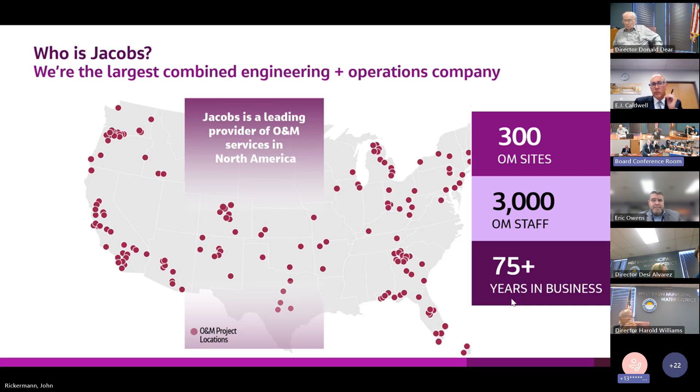Jacobs, as Director Alvarez mentioned, is a large engineering firm with a very significant operations branch, and that's fairly unique. In fact, we're the largest combined engineering and operations firm in the country, and maybe the world. Here are the sites we currently service, over 300 operation sites, and we have over 3,000 staff. If you look at California, you can see all the work we have here: 200 staff, 40 projects, and 500 engineers. We'll be deploying all this experience towards you. Now I'd like to turn it over to Sunshine Smith.

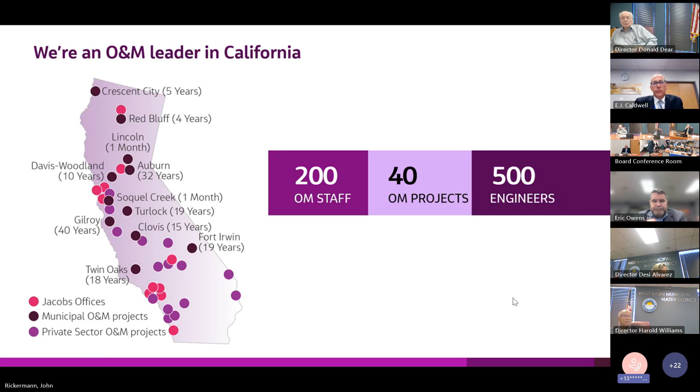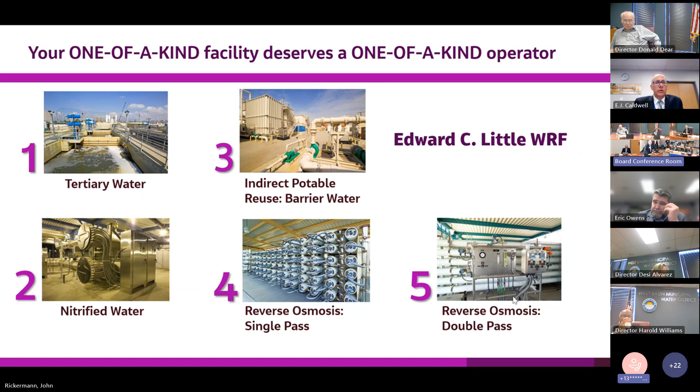Yes, of course, you know this. You literally have a one-of-a-kind facility in the world. There's no other facility, literally, that creates 5 different qualities of water from one source water. And the truth of the matter is, because of this, you deserve one-of-a-kind service of operations.

Thanks, Rich. So as Jacobs and Rich just talked about, we are a very large engineering firm. We provide operations, as he talked about, and maintenance, which includes asset management, preventative maintenance, and corrective maintenance. Steve's going to touch on that a bit more. Our digital tools, we're one of the leaders in that, John's going to talk about. We provide training and educational opportunities for all of our staff to make sure they're always finding that next step and learning more. Community outreach is a really important aspect to us.

We like to do tours of our facilities. Like this weekend, we have a golf tournament happening at our Gilroy facility. So we always like to involve the community, teach them where their water is being treated or where their drinking water is coming from. And then, as Rich touched on, engineering support, that's one of my specialties. I've been on the engineering consulting side for 17 years, and I've been able to meet all of our staff, build relationships with our design teams and consultants. Then we go into our facilities and assess and evaluate how that site specifically needs those engineering services.

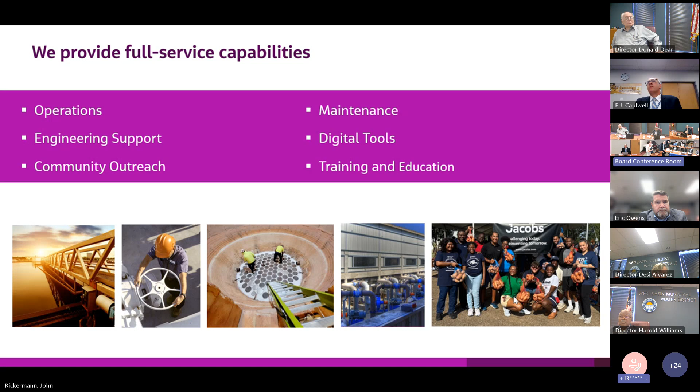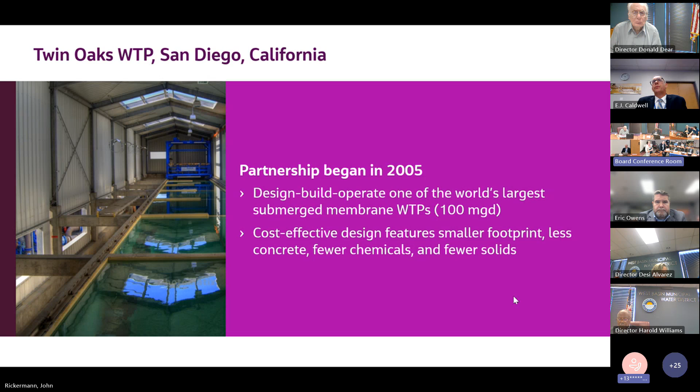So a couple of examples where we bring in all of these capabilities. Our Twin Oaks facility down in San Marcos - I just came from down there. We started our partnership with them almost 20 years ago, and we've been operating since 2008. They have one of the world's largest submerged membrane facilities. I think when they were built it was the world's largest - by now a couple of others have popped up.

As those of you who attended the Water Reuse California conference this week know, this was a big topic: the Soquel Creek facility that's going in, Pure Water Soquel. We've been in partnership with them since 2020 as the one-of-a-kind OMAR contract that John talked about.

So Soquel Creek's been a really fun project. Like Sunshine, I also started as a consulting engineer for about 10 years before I saw the light, or went to the dark side - take your pick - and went over to the operations side. I've been in the O&M side of the business for 22 years now. So Soquel Creek's been really interesting, as I'm sure you guys heard a lot about.

There's something we've discovered, because we also have a design build business in Jacobs: control systems are very important when you're starting up an advanced system. So we've actually gone ahead and are building, it's almost done, a digital twin for this facility, which basically mimics the control system and the hydraulics. To Sunshine's point, this helps with operator training when we take over, but it also helps us find gaps we want to know about before we start up. So that's just an example of some of the digital tools we're bringing to this really fun project.

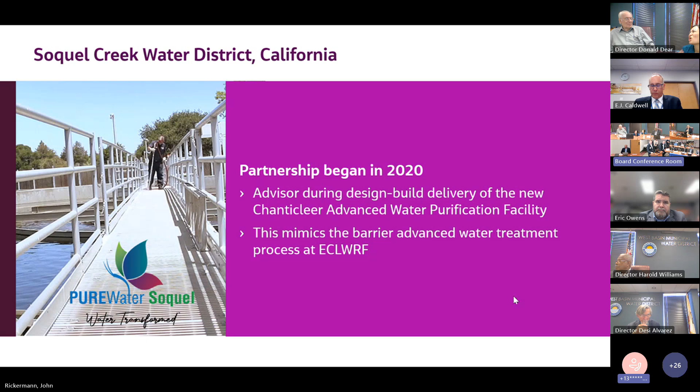We have a lot of other digital tools that we're working on. And the point I want to make about what we're doing with our digital tools: it's not business as usual. We've all been doing IT, we've all got laptops in front of us, right?

We've been doing this for decades. We've all got OT, the industrial control side, SCADA, PLC. We've been doing that for decades. Cybersecurity, fortunately, is picking up steam and we're doing more of that. But that's the traditional digital stuff we all have to do. That's the foundation for any plant these days.

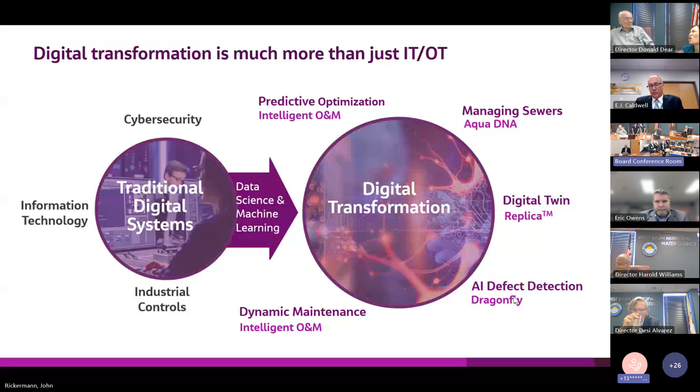I like to talk about this with an analogy. This is the way we're doing this: it's like driving directions on your smartphone. You type in on your GPS where you want to go, and your smartphone is accessing Waze or Google Maps or whatever. What's that accessing? It's got all the geography, the mapping, the traffic reports, the police reports, the weather reports, the traffic patterns. It's got all of that information available, and it's pushing to you a recommendation of your best route to get where you're going in the least time and save money.

We are doing the same thing with our O&M staff. We have all this information we've been collecting for decades, and we're leveraging that to provide a recommendation to our O&M staff. They're still the licensed operators, just like you're still the licensed driver when using your smartphone. If it tells you to get off at an exit and you want to take the scenic route, that's your option. Same with our O&M staff—we make a recommendation based on all the data we've got, but predictably, they're still the licensed operator. They make the call. I'm a licensed operator myself, and I want that capability. I trust my O&M staff—they know an awful lot, and I want them to have the final call. So that's how we're doing this.

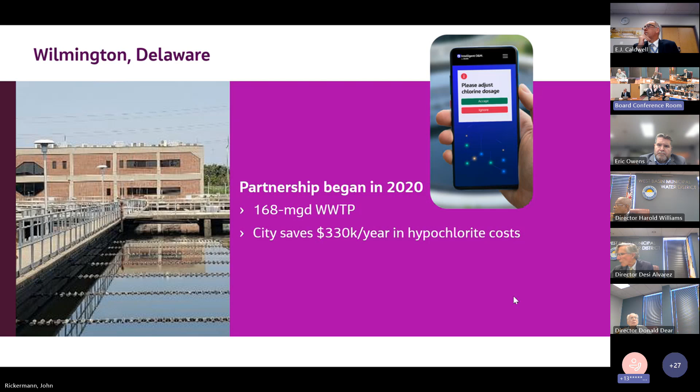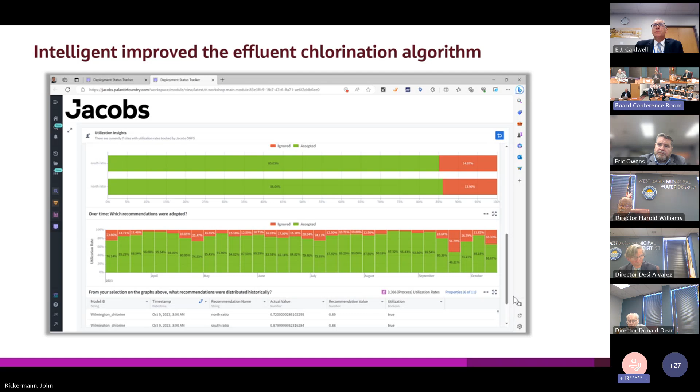That allows us to push recommendations to our staff on the right dosage to make while maintaining perfect compliance. That's created huge savings—over $300,000 a year—and this tracks the adoption by our staff, how often they adopt what's been pushed to them as a recommendation. It's fantastic. It's solving a problem they had, so this is really helping our staff be more effective and more efficient.

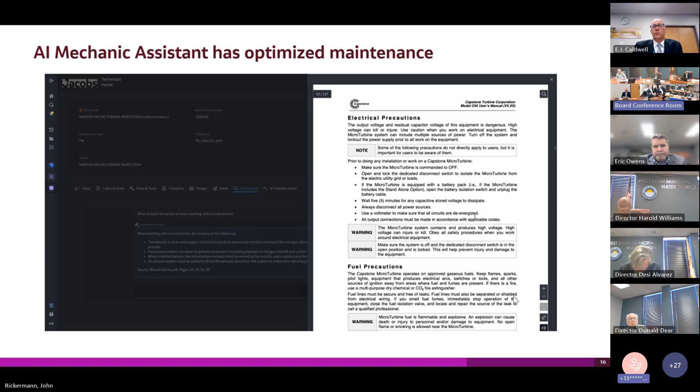Who's got time to read 50,000 comments from the mechanics over the past 20 years? This can do that. You know, what safety procedures should I look for when I'm doing this job? It'll pull it up for you, and to build trust, tell you where it got the information from, which page it got it from. So some of the capabilities we're bringing when we work on projects now as an O&M provider, really using cutting edge digital tools to help our staff.

Maintenance is a big deal, especially when we're taking over new projects. Steve's got a great example I want him to talk about where we took over a project that was really suffering.

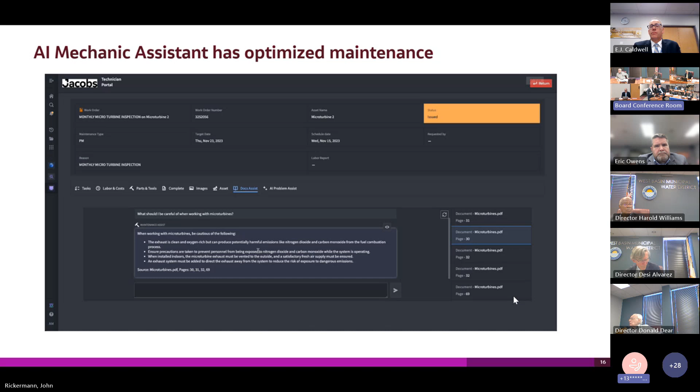Thanks, John. Just want to start off with the disclaimer that none of us knew what Rich was going to say when he introduced himself. So thanks for suffering through that along with the rest of us.

Like Rich mentioned, I manage our regional technical resources within Jacobs. I have about 100 professionals that report up to me that specialize in asset management, going in, helping the local staff set up an AM program, ongoing training. I have a regional maintenance team that comes in, supports the local maintenance team. They bring in specialized skills, specialized tools. They're the backup when the job may be a little bit bigger than the local team can handle. My West Coast team is actually managed out of the LA area, so very local here. Also have process experts, operations experts, compliance and reporting. So all those folks roll up to me.

But in my spare time, I also get to support new project transitions. My specialty seems to be some of the more challenging ones. My most recent one was what I call the transition of all transitions, a little place called Jackson, Mississippi, that some of you may have seen in the news. Me and two of my team members were the first 3 people on site the Monday after Thanksgiving in 2022 to help with resolving the water crisis.

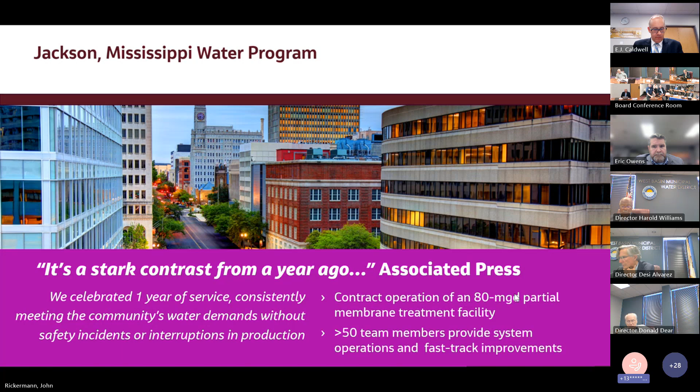Next slide here. So one of the big challenges in Jackson was the actual staffing levels. We onboarded 22 people when we took over, and we estimated we needed about 60 to successfully deliver 2 large treatment plants. So we had a big gap, and our goal was to hire all local.

Within 3 months, we were up to 56 FTEs, and we did that through local partnerships, intern programs with Jackson State, with Hinds Community College. I'll be going to speak to Hinds Community College next month to excite a new class of students, and I've got to convince them to be water treatment plant operators. This is a critical part of our delivery system. Everyone's struggling with finding good quality people, so our theory is we bring them into our culture, we grow our own.

Speaking to our culture, we don't own assets. People are what we invest in, and safety is integral to that. Our goal is to send everyone home at the end of the day with a little more money in their pocket and at least as healthy, if not better, than when they arrived. Safety is paramount for us. You can see by our results, compared to the industry average, we're at least 60% better.

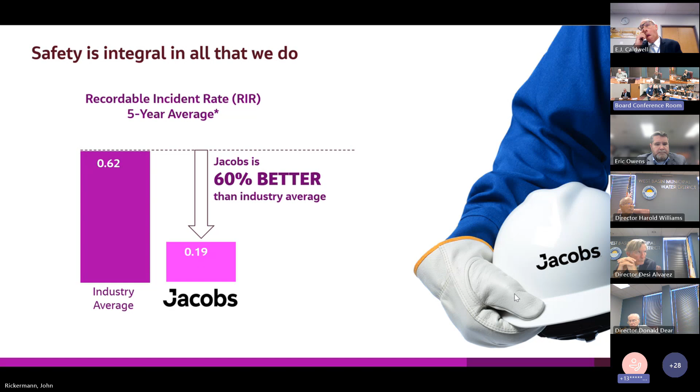Training and education is another cultural thing for us. I'm one person, I can't be everywhere, I can't see everything, and I can't address everything. So this is personal to me. I need my team to be just as educated, if not more, than I am. If they're successful, I'm successful. This is a core value for us: ongoing training, ongoing investment into our staff.

With that, I'm going to hand it back over to Rich.

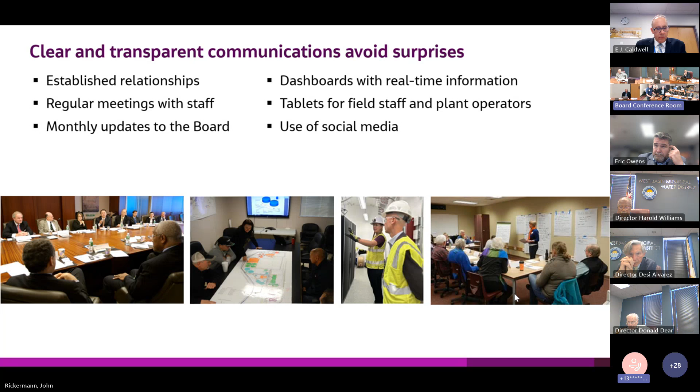Kind of a lame closer, so bear with me here. So yeah, these are easy things to say. Obviously you want high value and the best price, right? So how would we actually deliver that? You heard from our team. It's not just that we're going to low bid, that's one tactic someone could use. What we're saying is we have regional maintenance teams, regional asset management teams, regional engineering support that will be brought in as needed, not sitting there paid all the time when they may not have work. That's one way to absolutely reduce costs.

In addition, you heard from John, we have 47 use cases right now on those digital tools, and we're saving hundreds of thousands of dollars, if not millions. For example, with chemical doses like sodium hypochlorite, you spend I'm guessing $2 to $3 million a year. We think we can save you 10 to 20% minimum off the top just by using those digital tools that John mentioned, which push a recommendation to the field operator saying set this dose point here. You've done it before, it's worked before. You may not remember it, but if you set this point, you'll save X amount of chemical. So that's how we do it: we bring our expertise and the right amount of resources at the right time. The combination of those things is high value that reduces your cost.

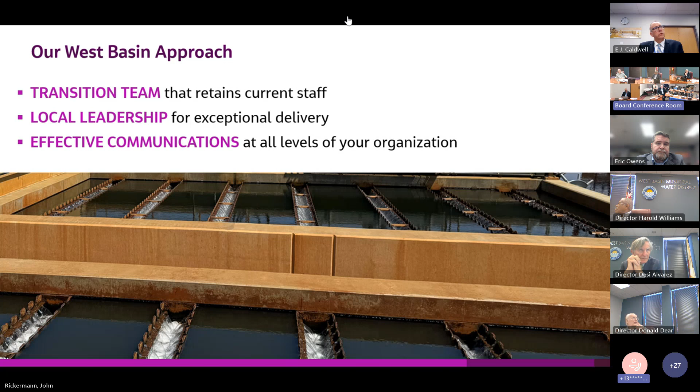I'd like to thank all of you folks for a very nice presentation. I don't have any other comments or questions. I appreciate the time and effort that you've given us this afternoon. And if you have any questions of the board, please feel free to ask them.

No, thank you so much. We really appreciate it. And how was my blue shirt? I wore purple today, but I appreciate it very much. We really do. This was all you setting this up, Director Alvarez, and I appreciate the invite very much. Thank you, and I hope to see you all soon.

Okay, so we will move on with the rest of our agenda. The next item up is the action calendar. We have quite a few items in the action calendar.

So let's start. The first one is 5A, amend the agreement for funding design construction of the Palos Verdes Recycle Water Pipeline Project. Mr. General Manager.

Yes, thank you very much, Mr. Chairman. This item does begin on packet page 4. For this presentation, we have Veronica Govea, our engineering supervisor. Good afternoon, Chairman Alvarez and members of the board. Yes, I'm here to present item 5A on your agenda.

It starts on page number 4 of your package. This is a board item to request authorization to allow the general manager to execute amendment number 1 to the existing agreement among West Basin, Cal-Water, and the Palos Verdes Golf Club for the funding of the Palos Verdes Recycle Water Pipeline, which includes also the pump station.

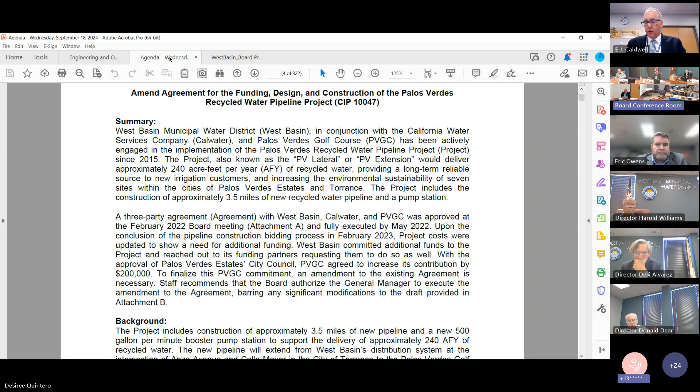In the original agreement, Cal-Water agreed to reimburse West Basin for $2.5 million, and the Golf Club agreed to reimburse $500,000 specifically for the pipeline, the PV project, and $600,000 for on-site retrofits that they need to do within the golf club to get the recycled water running within the golf club.

As you might recall, in 2023, when we were bidding the projects for the pipeline and pump station, some of the bids came out a little bit higher, and this triggered West Basin to look for additional funding. The golf club has agreed to pay an additional $200,000 to what they had agreed.

So this agreement has been reviewed by West Basin staff and the legal department, as well as its partners, PV Golf Club and Cal-Water. It has already been approved by the City Council of Palos Verdes Estates. We're here to present this item, and with this, I will read the recommendation, which is on page number 6.

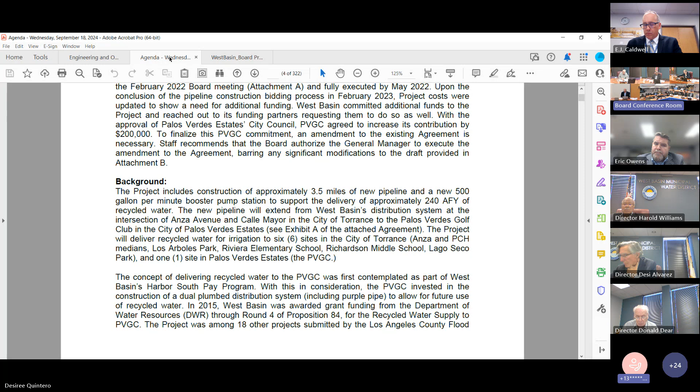We're still finalizing the final comments from the agencies, but we believe that these comments are very minor. There might not be any changes that will significantly change the agreement.

But with this, I will read the recommendation that the board authorize the general manager to execute amendment number 1 to the existing agreement by and among West Basin Municipal Water District, California Water Service Company, and Palos Verdes Golf Club for the funding, design, and construction of the Palos Verdes Recycle Water Pipeline Project, barring any significant modifications to the draft provided in the attachment. With that, I conclude my presentation. I will be happy to answer any questions. Thank you very much.

Do the board have any questions? Director Williams, start with you. No, I don't have any questions.

I just would like to say that I'm happy to see the project is coming to a close and that it was done in a way that the folks on the Hill are happy with. Thank you.

Director Dear: Glad also that we're coming to close on this project. Be a little weary, the whole thing.

Director Gray, do you have any questions or comments? No, just to re-echo what the two directors said. Thank you.

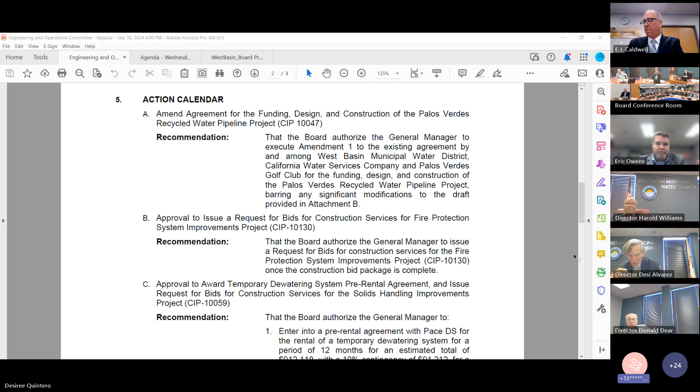Okay, with that, we will move this item, if concurrence of Director Williams. I concur. Okay, next item is item 5B, which is the approval to issue a request for bids for construction services for the fire protection system improvement project.

So, Mr. General Manager, please introduce that item. Yes, Mr. Chairman, this item begins on packet page 172. And for this presentation, we do have Orlando Rodriguez, our acting engineering supervisor.

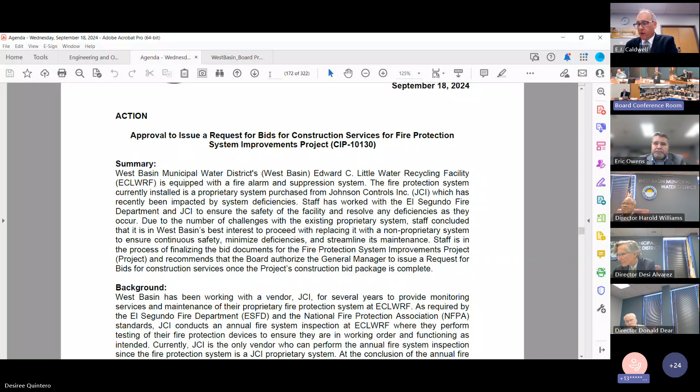Thank you, EJ, and good afternoon, Chairman Alvarez and members of the board. As EJ mentioned, please turn to page 172 of the agenda packet for a copy of the staff report. So first, I'd like to start with some background information on where we're at.

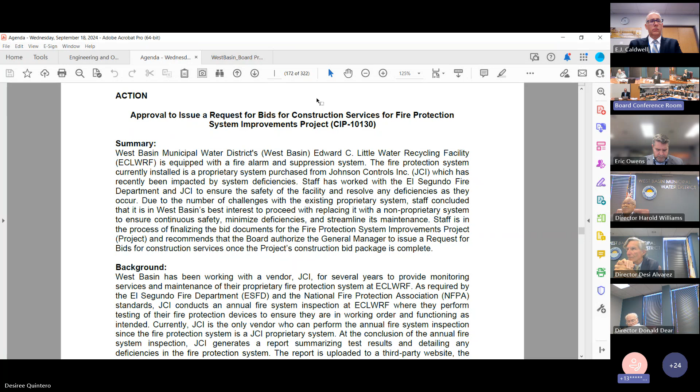ECL is currently equipped with a proprietary fire alarm and suppression system supplied by Johnson Controls, also known as JCI, who have several offices throughout Southern California. West Basin has been working with JCI for several years now for them to provide fire monitoring services as well as maintenance of their proprietary system.

As required by the El Segundo Fire Department and the National Fire Protection Association standards, JCI conducts an annual inspection of the fire protection system where they test devices to ensure that they're in working order and functioning as intended. Since this is a proprietary system, JCI is the only vendor that can perform this annual fire system inspection. At the conclusion of the annual inspection, JCI generates a report summarizing the findings of their testing, as well as detailing any deficiencies within the system itself.

They also, at the conclusion of the inspection, upload this report to a third-party compliance engine where the fire department is notified of its completion, and they could view the report to see all of the findings and deficiencies that have been found by JCI.

In the most recent annual inspection report completed last July, numerous deficiencies were identified and the fire department notified West Basin to correct those deficiencies in a timely manner or potentially face daily fines until corrected. The fire department also requires that ECL be placed on a 24-hour fire watch, where Veolia staff have to walk the site every 30 minutes to verify there are no fires present and no threat of a fire exists.

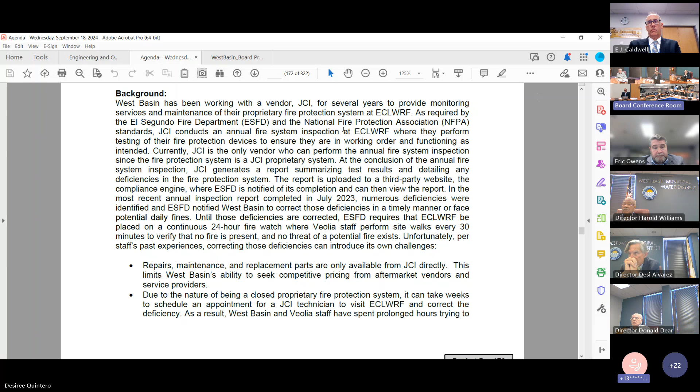Because of that, staff and Veolia staff have spent numerous hours trying to correct those deficiencies internally, and JCI has refused to negotiate any of their terms and services. In the monitoring services agreement, although staff and West Basin's legal counsel have concerns regarding JCI's terms and conditions, West Basin reluctantly entered into the agreement out of necessity and as a safety risk with not having remote monitoring services of the fire protection system.

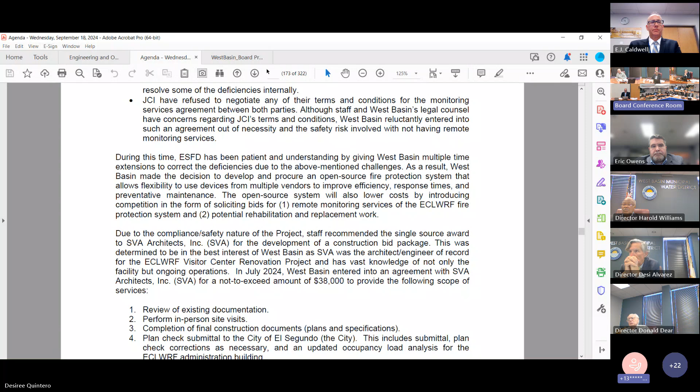Due to these ongoing struggles, staff made the decision to develop and procure an open source fire protection system that allows for flexibility to use devices from multiple vendors to improve efficiency, response times, and preventative maintenance. The open source system will also lower costs by introducing competition in the form of soliciting bids for those remote monitoring services, as well as any potential R&R work.

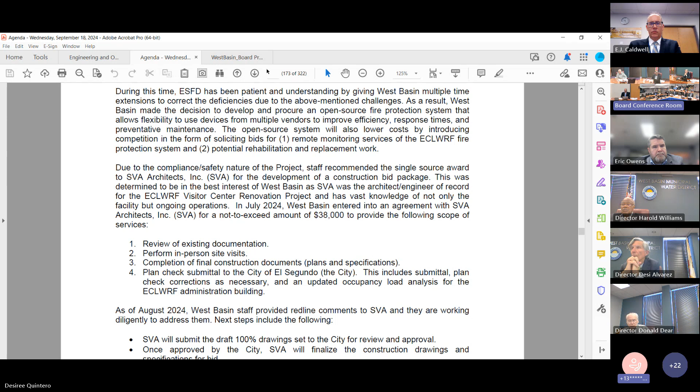Because of the compliance and safety nature of the project, staff recommended a single source award to SVA Architects for the development of a construction bid package. SVA was the engineer of record on the ECL Visitor Center renovation project, so they have extensive knowledge of JCI's existing fire protection system.

In July of this year, West Basin entered into an agreement with SVA for a not-to-exceed amount of $38,000 to review all existing documentation of the ECL fire protection system, perform in-person site visits and assessments, develop and complete a construction bid package, and submit for plan check to the city of El Segundo for review and approval to obtain a permit for the project. As of this month, 100% design drawings have been completed, and we are getting ready to submit to the city for plan check in the next couple of days.

You could actually find a copy of the 100% design drawings as attachment A on page 175 of the agenda packet. In total, we will be replacing 162 devices, and these all range from smoke detectors, heat detectors, pull stations, the fire panel, throughout different locations at ECL.

Next steps: once we complete the plan check and receive approval from the city to proceed, SVA will be completing a construction bid package. Staff will then issue a request for bids to provide construction services for the project, and then staff will recommend awarding the project to the potential low bidder at the conclusion of the solicitation.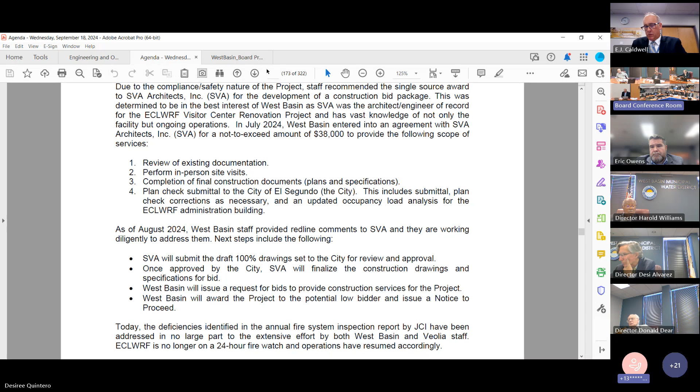For reference, because of that, Bay Alarm's labor rates are about half of JCI's hourly labor rates. So with that, I would like to read the recommendation that the board authorize the general manager to issue a request for bids for construction services for the fire protection system improvements project, CIP 10130, once the construction bid package is complete. And with that, I'd be happy to answer any questions.

Director Williams, do you have any questions? No, thank you. Director Dear? Director Gray, do you have anything? No, thank you.

One question, if you mentioned it, I didn't hear it: what is the estimated cost of the improvement? We just received that from SVA, so it's about $290,000 for the overall project, construction.

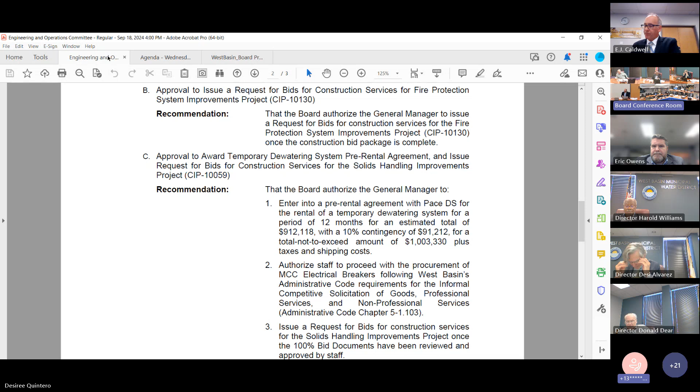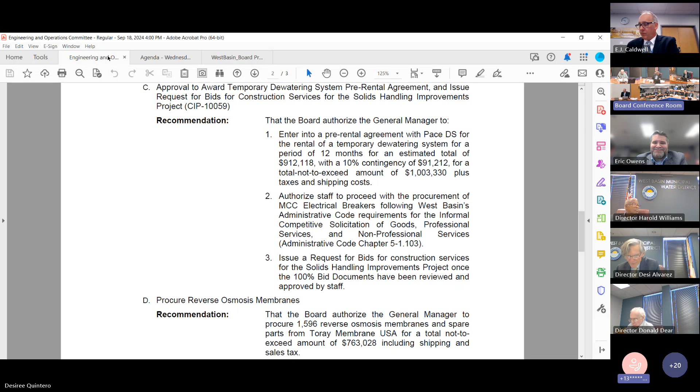Mr. Chairman, I think you jumped over 5C. Oh, I did. Let me go back to item 5C, which is the approval to award a temporary dewatering system pre-rental agreement and issue request for bids for construction services for the solid handling improvement project. General Manager, please read this item.

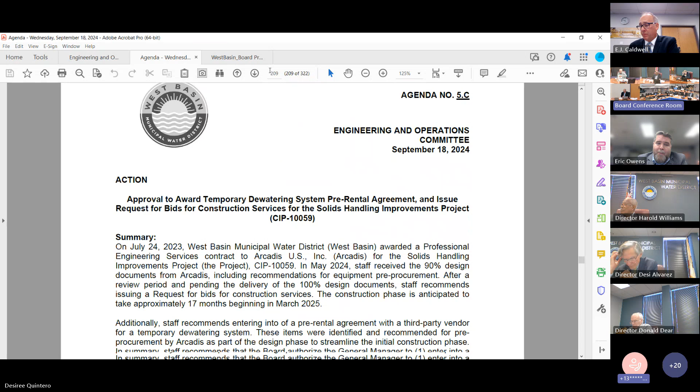Yes, Mr. Chairman, this item 5C does begin on packet page 209. And for this presentation, we have John Benner, our engineer two.

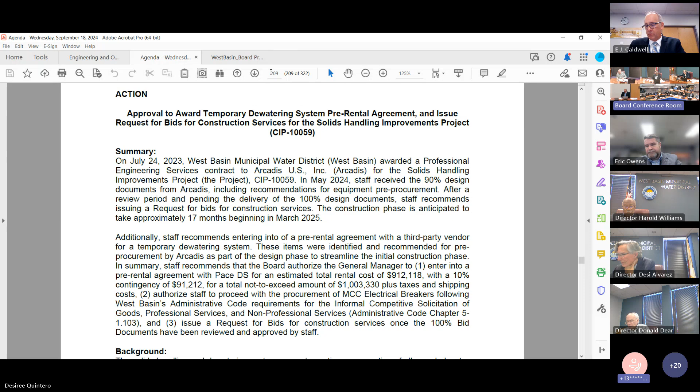Thanks, EJ. Good afternoon, Chairman Alvarez, members of the board. Today I'll be presenting an action item recommending the pre-rental agreement of a temporary dewatering system, the procurement of electrical breakers, and the posting of a request for bids for construction on the solids handling system improvements project, which is CIP project number 10059.

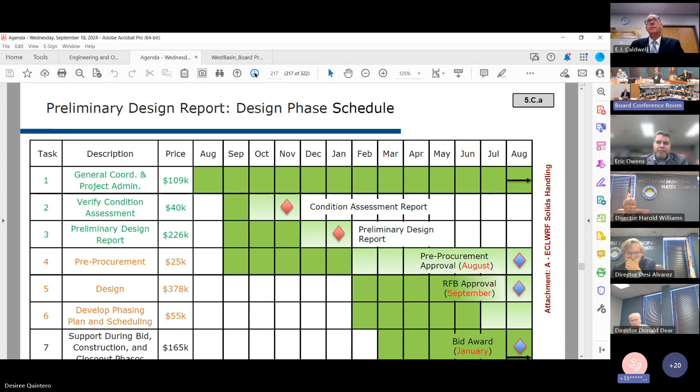As EJ mentioned, item 5C begins on packet page 209. We'll be beginning today with the presentation, which begins on packet page 216. Next slide, please. So this slide depicts the intended design schedule. Items in green are completed, those in orange are currently underway, and the final task there will begin once we post a request for bids on the construction project.

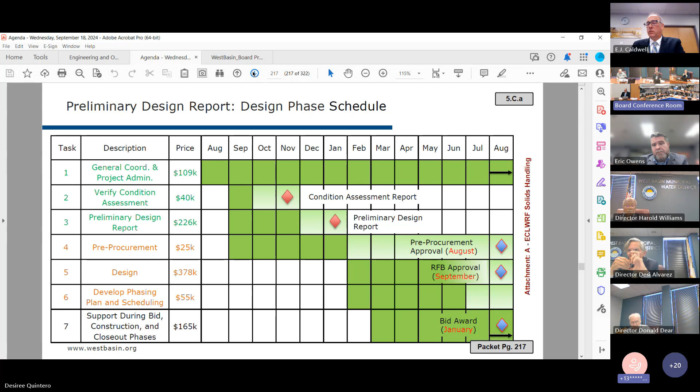We've seen this slide a few times now, every time I've presented this project, so I won't spend too much time here. There haven't been any changes from last month, but the key date to note here is the intended bid award, down in the bottom right of this slide, in January of next year. So that's what we're currently targeting to meet the preliminary construction schedule. Next slide, please.

So over the next few months, and previously the last couple of months, we will be returning regularly to recommend approval of pre-procurement items for this project. Most of these procurements will be conducted by invitation of quotations, with the remaining components being procured by sole source agreements due to their bespoke nature.

These pre-procurements are recommended by the design engineer for components with minimal risk and long lead times that may impact the construction schedule. Procuring these items ourselves also provides an added benefit of saving the district significant expense on profit, overhead, and other margins that a contractor may place on procuring these items.

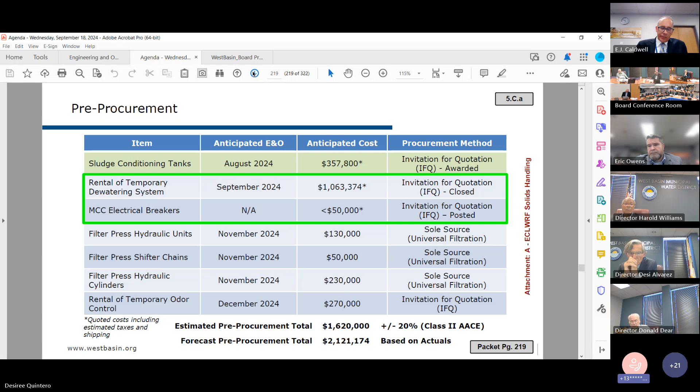So with this staff report, staff are recommending entering into a pre-rental agreement for a temporary dewatering system. This system will be used to temporarily replace the two plate and frame filter presses while they're being refurbished. It's an estimated period of approximately 12 months during construction.

As this dewatering is such a critical plant process, we decided to rent two centrifuges for redundancy, so that if one fails, we can cut immediately over to the other centrifuge, and we can continue to remove solids from the system. We're installing this temporary system adjacent to the dewatering building to the northwest, on an open air space there.

Where the contractor will pour a concrete pad and ready temporary connections for the vendor of the temporary system to tie that in. Unfortunately, this is going to be close to the property line from the Topgolf neighbours. So we'll be procuring additional odor control systems to mitigate any odor issues.

And we'll also be operating the system, or our contract operator will be operating the system overnight in the early hours of the morning to reduce any further impact. The rental will be undertaken on a monthly basis after the initial delivery, installation, commissioning, and training.

And as I said, it will be operated by our contract operators to allow us that flexibility to operate the system, to remove additional solids, receive additional solids in the influent to ECL, but also to mitigate any odor issues. So this will require us to change some times and frequency at our solids facility.

And so next month, the operation staff will be bringing an action item to go out and bid on our solids haulage contract next year to cover this period of time.

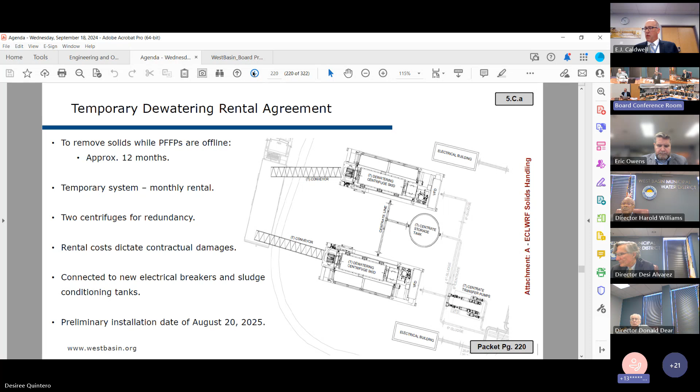So this is why those systems will be selected for pre-procurement, so as not to impact that construction schedule in the early days. Next slide, please.

So the engineer's estimate for this temporary system, including installation costs, was $2,067,500. Since that estimate, we have downsized the centrifuges to fit within the available electrical load, so we did expect the final quote to come in below this. However, the final quotes we received were still significantly lower than even that expectation, with the winning bid being provided by Pace DS, based in Alberta, Canada, for a total anticipated cost of $912,118, not including taxes and shipping. This bid includes installation, commissioning, training, and a monthly rental cost of $72,189.

It should be noted this bid includes potential penalties of $5,000 per week if delivery of the system is required earlier than planned. So if construction moves ahead very quickly and we're ready earlier than planned and want to bring those temporary dewatering systems in, Pace DS has stated they'll need an additional $5,000 per week for every earlier week. However, they've committed to maintaining their monthly rental rate of $72,000 per month if there's any extension of that period, so if we go beyond the 12 months. Other vendors talked about incurring fines if we went over that period, but Pace DS is committing to their standard rental cost.

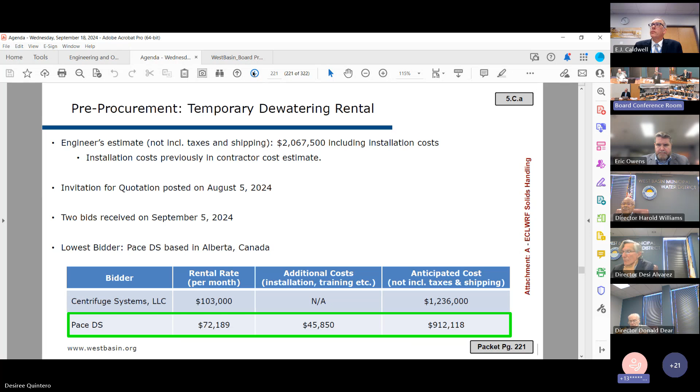Next slide, please. So we also went out for bid last month for 3 electrical breakers, 2 of which will feed the temporary centrifuges, while 1 will feed the temporary odor control system. These breakers will be installed in existing motor control cabinets within the solids handling building electrical room, and they'll need to be installed prior to the temporary dewatering system being installed, so obviously by latest August of next year.

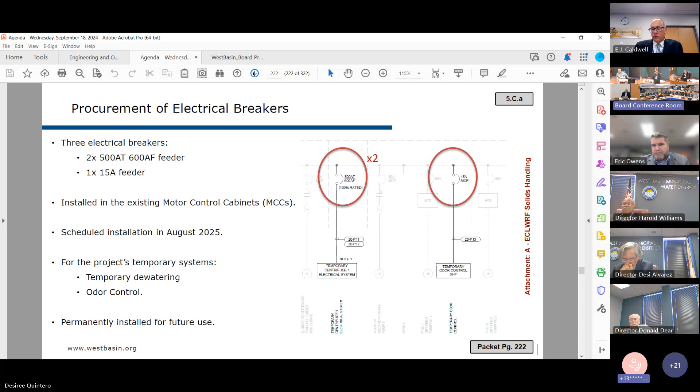Unlike the equipment they're powering, the breakers will not be temporary. This is due to both their low cost and utility for other elements of equipment. They'll be installed in empty buckets within the MCCs, so they're not impeding any other equipment — we don't have to take anything out to put those in. They'll also be invaluable if we ever have to use temporary dewatering equipment again, say if there's a Hyperion upset or an issue with that temporary dewatering system and we need to bring in temporary centrifuges again, or if we decide to install new equipment at or near that building, we'll need to use these breakers. So it's worth keeping. Next slide, please.

So as mentioned, we went out for bids for these breakers last month. The initial engineer's estimate was $52,000, and as it's above the $50,000 limit, it requires competitive bidding, bringing that to the board, or the usual public procurement practices. We received only 1 quote out of those 3, for around $8,000. This quote was actually incorrect — they quoted the wrong breakers — but it did cause our design engineer to reach back out to the industry for re-quotes and to assess why the cost was so much lower.

It does seem that industry constraints in the last 6 to 8 months on electrical equipment have lessened considerably. In addition, because we've reduced the electrical load requirements since the estimate by downsizing the centrifuges, the design engineer now estimates that the new electrical breakers will cost around $20,000. This is below the usual threshold for board approval, according to West Basin Administrative Code. However, it does form part of this pre-procurement package that staff have repeatedly presented to the board, so we thought it prudent to bring it back in this presentation and include it with the other approvals. Staff will be requesting board approval to take opportunity of the market conditions and purchase these breakers once we receive final quotes that meet the specs, with an estimated cost of around $20,000. Next slide, please.

So I've been over the schedule a few times now, but we're anticipating the 100% design submittal in early October. There are minimal design modifications required from the 90% design, so we don't anticipate any major design changes. The review period will likely take most of October. We anticipate having a fully prepared set of bid documents in late October, early November. Due to the project complexity and the always busy holiday period, we'd like to give contractors 6 to 8 weeks to prepare their bids, so we anticipate bids in mid to late December. This leads us to a potential board approval in January 2025, as I mentioned earlier, which matches our anticipated construction schedule. If we award the contract in January 2025, we can receive notice to proceed in early March, which meets our preliminary construction schedule and keeps us on schedule for that August 2026 final completion.

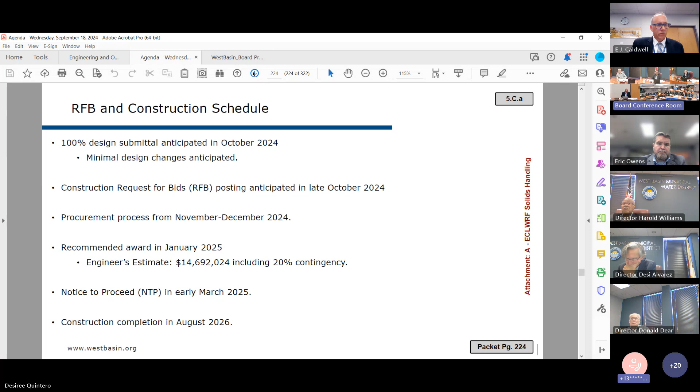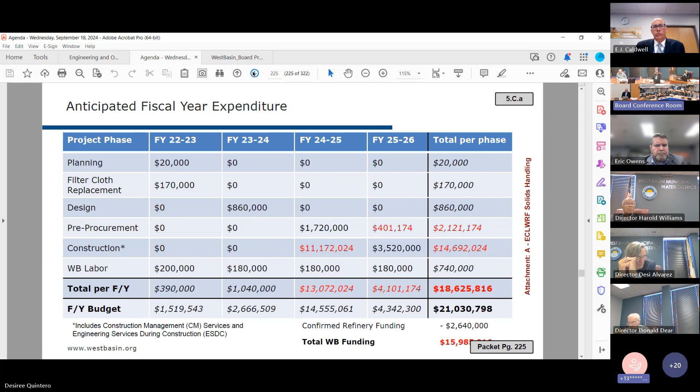However, due to a reduction in anticipated construction costs, we are currently forecasting the overall project costs will come in approximately $1.5 million less than was anticipated in this year's budget book. That relates to $1.5 million less in West Basin funding required.

That brings me to the recommendations before you, on packet page 215. Staff recommends the board authorize the general manager to: 1, enter into a pre-rental agreement with Pace DS for the rental of a temporary dewatering system for a period of 12 months for an estimated total of $912,118, with a 10% contingency of $91,212, for a total not to exceed amount of $1,003,330 plus taxes and shipping costs.

2, authorize staff to proceed with the procurement of MCC electrical breakers following West Basin's administrative code requirements for the informal competitive solicitation of goods, professional services and non-professional services, that's Administrative Code Chapter 5-1.103. And 3, issue a request for bids for construction services for the solids handling improvements project once the 100% bid documents have been reviewed and approved by staff.

And with that, the presentation is finished. I'm happy to answer any questions.

Thank you very much. Director Williams, do you have any questions? Yes, to the general manager.

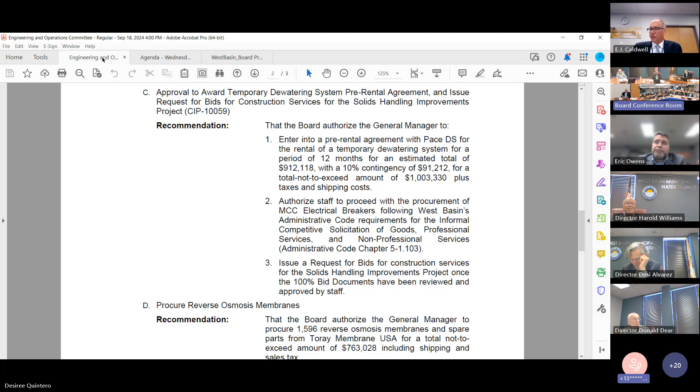Okay, well, this project has been around for a while, so we will, with Director Williams' concurrence, move this on. I concur. And then we will return to item 5D, which is the procurement of the reverse osmosis membrane.

Mr. Chairman, as you recall, this item is related to an ongoing dispute between West Basin Municipal Water District and the Chevron refinery in El Segundo. Staff is available for a presentation today. I'm hopeful that our conversations with Chevron will be a little bit more fruitful towards the end of this week. If you'd like, we can bring this item to the full board as a potential action item and present it there, or we can have staff provide the presentation today, which might save time on Monday.

It might be best if we had a brief presentation, but let me ask, is it going to be a 5-minute or 15-minute presentation? If we keep it short, let's have the presentation now. Sounds like this is one of those items that we may, depending on what happens at the board meeting, defer for another month. Agreed. So, at least for the benefit of us today, let's get an idea of what the item is, and then we can go with the other side of it at the board meeting. Go ahead. All right, so thank you, Director.

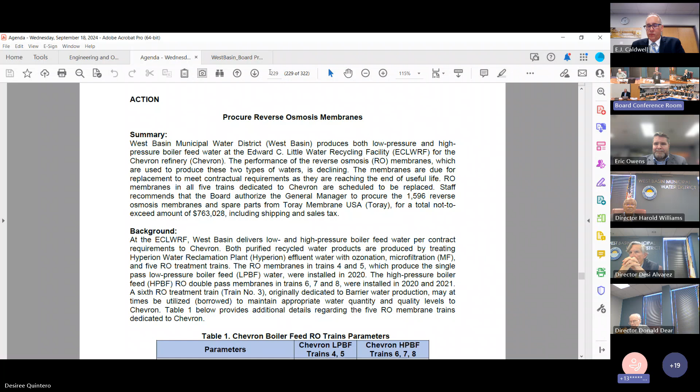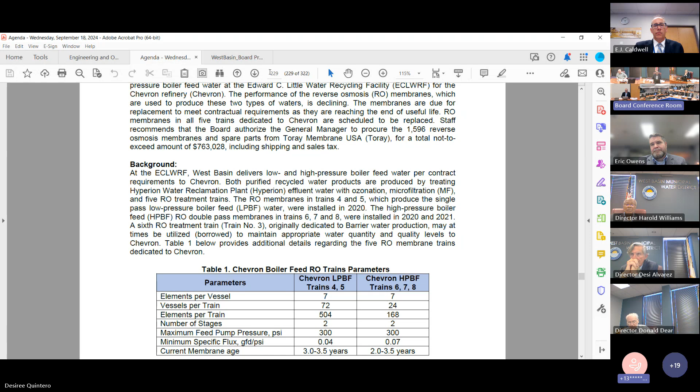This item is related to the Chevron RO trains, and we provide low pressure boiler feed and high pressure boiler feed water to Chevron refineries. This RO system consists of 5 RO trains together, 2 first pass and 3 second pass RO trains. These RO membranes have been in place since 2020, 2021, so at least 3 to 4 years old.

Per the 2020 Chevron agreement, they've agreed to replace or request West Basin to replace these membranes every 3 years. The reason is there are 3 sensitive constituents very sensitive to their boiler operations: hardness, silica, and iron. All these constituents, as the water quality has shown the last few months, are approaching, if not already exceeding, the water quality requirements per contract.

In June, staff had reached out and issued an RFQ to the 2 pre-qualified RO membrane manufacturers. At the end of June, we received 2 quotes from both Toray and DuPont. DuPont's bid was issued through WaterSurplus, which is the first time the membrane manufacturer issued through a wholesaler or distributor.

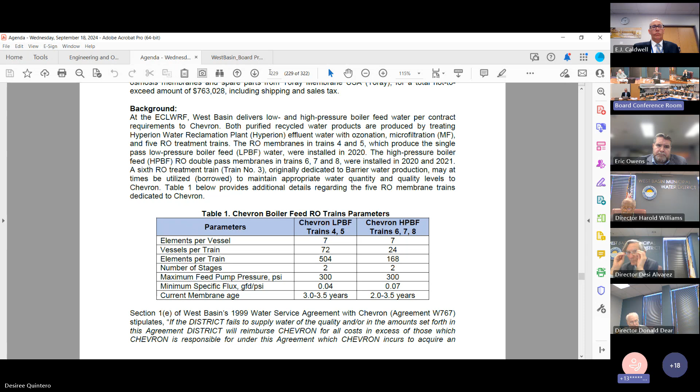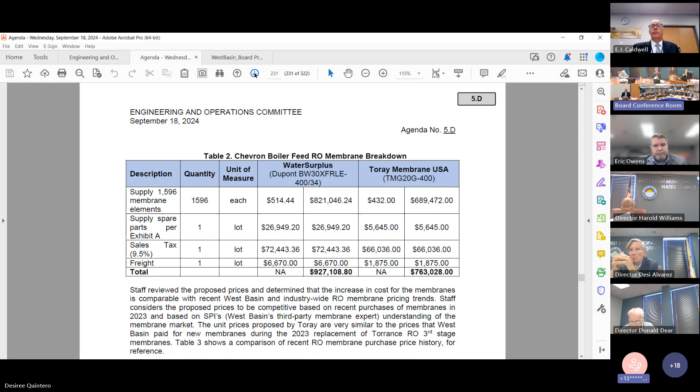Per table 2, Toray membranes is the low bid with a total cost of $763,028. The unit price for the membrane is $432 per membrane.

As noted, this is roughly a 12 to 18% increase compared to the previous larger RO membrane purchase, though that previous purchase was made before COVID, so obviously there have been a lot of changes with supply chain issues and chemical pricing increases and whatnot.

Staff discussed with the current membrane market with SPI and consider these prices competitive. In accordance with West Basin's strategic goals 1 and 3, to provide reliable drought-tolerant water supply and our commitment to provide safe and high-quality water by meeting current and anticipated water quality requirements, staff is recommending the board procure these membranes to allow operations to meet these goals.

With that, I'll be glad to read the recommendations. The recommendation is that the board authorize the general manager to procure 1596 reverse osmosis membranes and spare parts from Toray Membrane USA for a total not to exceed amount of $763,028, including shipping and sales tax.

Happy to answer any questions. Thank you very much for the report. So do we have any questions, Director Williams?

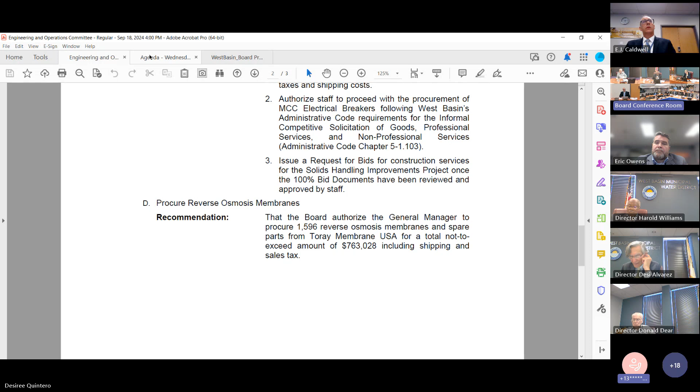Yes. Okay, so next is the information calendar, and first item up is status of the agreement with California Water Service Company for funding contributions towards the Juanita Millender-McDonald Carson Regional Water Recycling Plant Phase 2 expansion. All right, Mr. General Manager.

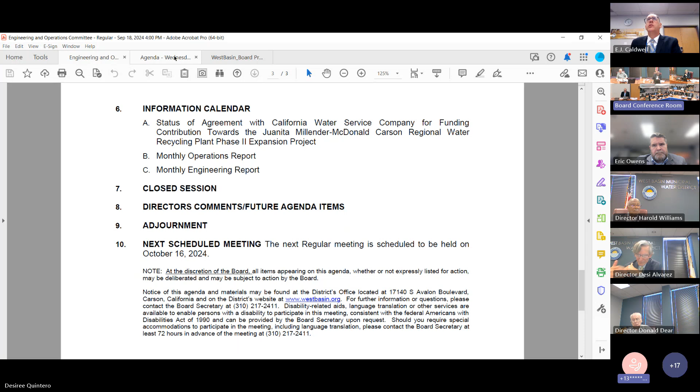Yes, thank you very much, Mr. Chairman. I'm going to do my best to introduce this item, and then I'll bring in Barkat Masurlian, our Executive Manager of Engineering Operations. This item begins on packet page 233.

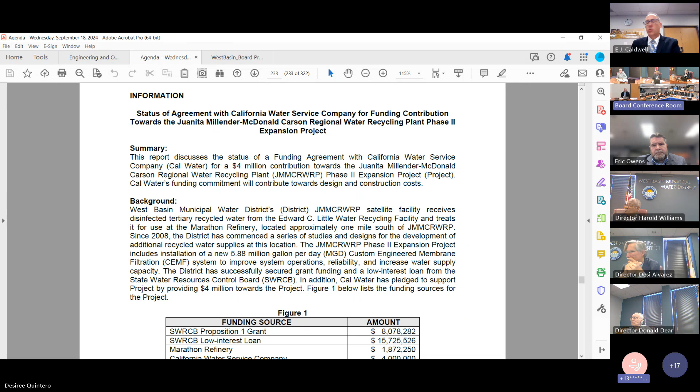I wanted to bring it to your attention. This is related to the Juanita Millender-McDonald Carson Regional Water Recycling Facility and the current construction there. You can see in Figure 1 the funds procured for the project. We have a little over $8 million from a State Water Resources Control Board Proposition 1 grant for a recycled water program.

We have the State Water Resources Control Board low interest loan. We did receive some funding from Marathon Refinery. And then, of course, Cal Water Service Company, and you can see that they have pledged $4 million.

If I could provide a little history, back in roughly 2013, 2014, Cal Water Service Company offered to partner on this project with West Basin Municipal Water District. Over the course of several years, we talked about how that funding mechanism would be made. No agreement was executed for Cal Water Service Company to provide those funds. Back in 2021, I had a chance to meet with a representative, Mr. Dan Armendariz from Cal Water Service Company.

I mentioned to him their promise and some of the agreements that have been provided by Cal Water Service Company to contribute to this project. Mr. Armendariz gave me his word that Cal Water Service Company would honor their pledge of that $4 million. And when they brought in Ralph Felix, I met with him, and he also said that Cal Water Service Company would stand by their promise to contribute to this project.

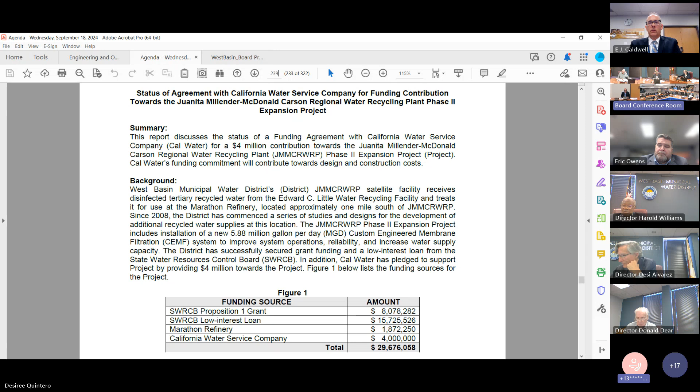We currently have only one, used to be a temporary pipeline that goes into the MF filtrate tank. But with this project, we built pipelines that extend from Cal Water's metering facilities located just outside our property, going into our site and to the three tanks—the MF filtrate tank, but also the product water tanks for nitrified water and the boiler treated water.

So again, this is a backup potable water system that extends from their existing facilities, from Cal Water's facilities, through our site to our tanks.

So we identified these as candidates. Cal Water operates and maintains potable water systems outside of this facility, and the facilities that we are showing that could be converted over to them or transferred over to them entail 20-inch pipelines and 12-inch pipelines that go to the tank. Following this particular page are photos of where those pipelines come out of the ground and go over the tank.

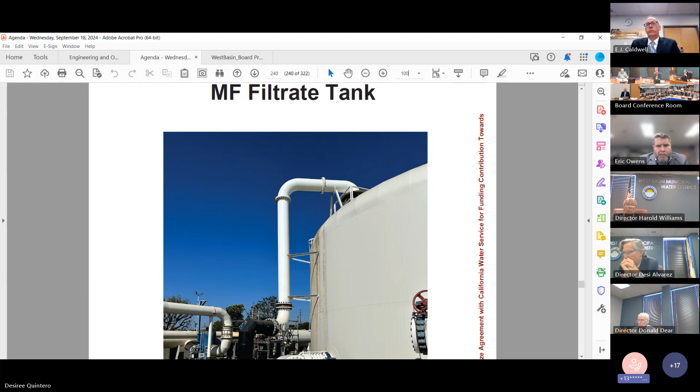We can go to the next page here. What we are proposing is that the assets would be the pipelines going under the ground and all the way to the flow control valve that you see there at the end of the dark pipeline over there. So those are the assets that we've conveyed to Cal Water.

So here are some ideal candidates. The reaction seems favorable, and so right now, as EJ mentioned, we are working out a slight update to the agreement attached in attachment A that talks about these assets. Hopefully we'll come back with an updated agreement that identifies all these and puts them in writing. That concludes our update. We're happy to answer any questions.

Are there any questions from the board? No. Director Dear?

I'm kind of troubled with this idea. We're gonna give up these pipelines. We don't need them. This is strange.

Veronica earlier talked about the PV lateral project. As part of that project, Cal Water contributed $2.5 million, but what they're getting out of that project is a stretch of pipeline and a meter. So it is actually something agreed with Cal Water on that project. This is something very similar where they're contributing $4 million, and they're saying it has to go towards some sort of a project, some sort of pipeline or asset that is part of this project. So it's not too different from what we've experienced in the past.

And this particular system, water's not going to be flowing through the system all the time, only when we need it. The only thing I would add is that the California Public Utility Commission allows investor-owned utilities to invest in infrastructure like this. However, they're required to incorporate expenses like this into their rate case that they present to the PUC.

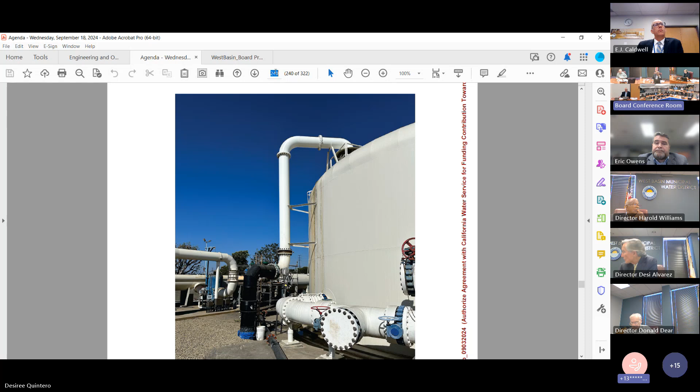And with the acquisition of the assets, they're acquiring the maintenance responsibility, even though it's brand new pipe. That's what we would be pushing for. All right, I don't have any other questions, so if Director Williams.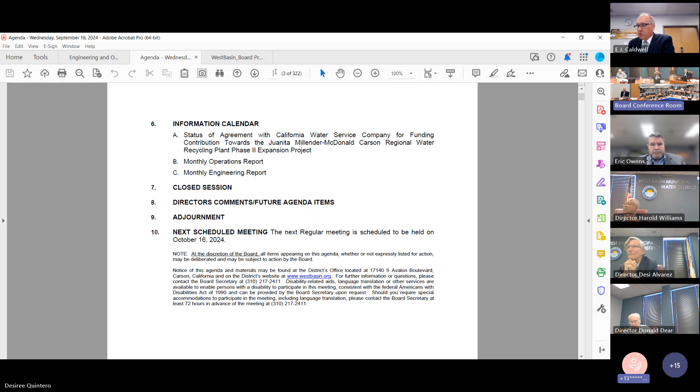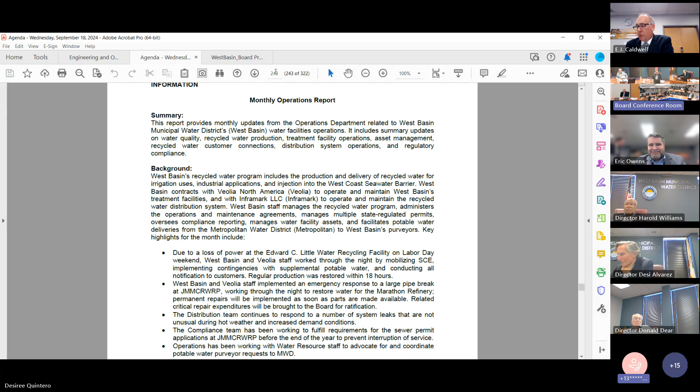Back in our standard regular report, the monthly operations report. This item begins on packet page 243. We again have our team of experts here for this presentation, led off by Uzi Daniel, manager of operations, and then Jenny Malpe, water quality and environmental compliance supervisor, Susanna Lee, our operations supervisor, and Frank Pukes, our operations supervisor.

Good afternoon, directors. Is that working? I took drama. Thank you very much. We have a presentation if the board would like to see it, but just some real quick highlights.

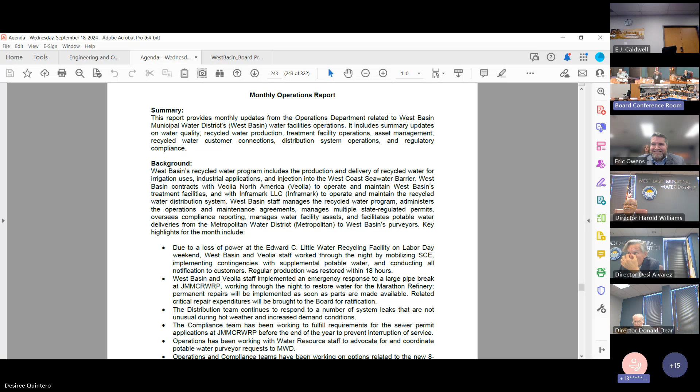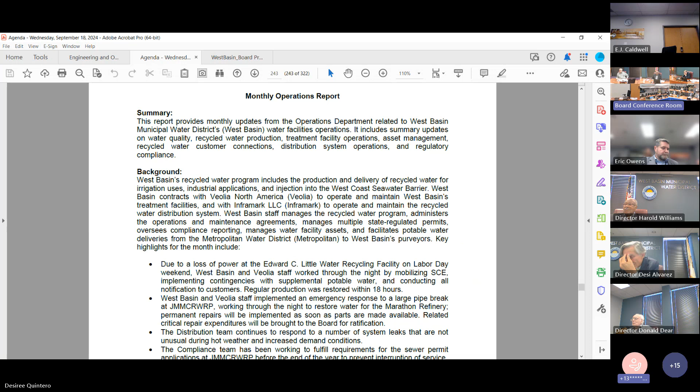Something I think is great right now: as the directors are aware, we had an emergency incident, a power outage on Labor Day weekend - we lost power, lost flow. I know we have to often all share in pain together for running operations, but also share in the congratulations for a job well done. There's a team of people that answered their phones at 2am, a team that saw it and answered it earlier, so thank you for that. Some of us have studied incident command and know how you need to operate it, and I'll say we have some practice now. It really was handled well - I hate to use the word flawless, but it really was handled well.

Edison was our hangup - we did eventually get a hold of them, that's what the issue was. We're following up with them. We were able to notify everyone we needed to, we had the public outreach, and our customers were very thankful of that.

Then the bad-good part was when we were finally coming back online, we had a second emergency event. What was great is that because we had this incident command structure, we literally each handed off our duties to another person. I want to thank all of the board support for that, and our management - it went well. We have someone here who was actually sleeping in their car to make sure while the rest of the crew handled it. So that's just something to say: what we do to make sure our water keeps flowing, no matter what occurs, even outside our control, is worth celebrating as public servants. So thank you for that.

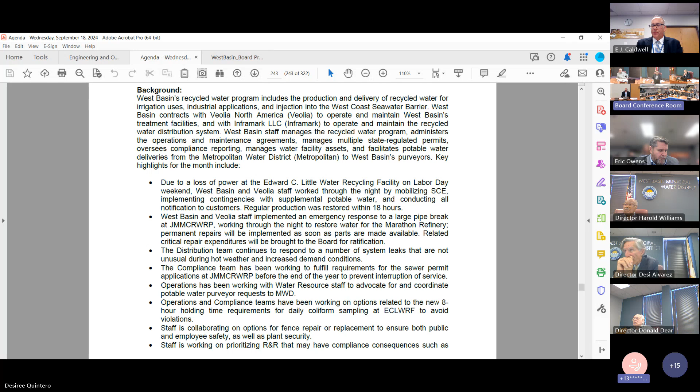Some of the regular things you'll see in the presentation, compliance-wise: we have some new inspectors with LA County, and a lot of things coming up with them. Everyone's very active right now preparing for the pure water projects. We're also dealing with compliance, finding some records for regulators. The new 8-hour hold time on coliforms has been a real struggle, so we're working on contingency plans, looking at if we need to do that in-house. In addition, we're doing some of the regular R&R, working with engineering to assure the repairs we need, because they have compliance hooked to them - for example, you saw today the fire panel. We have some pressure vessels, even HVAC now with AQMD standards - if some of your air units aren't working right, you can get a violation. So we're working on how we prioritize things, really working as a team, and I think you'll see some of that here.

And if you want to see the presentation, if you have time, we can proceed with that. Anybody have a question? See the presentation? No. No. Any question for the presentation? Okay. Disappointed in them. Thank you.

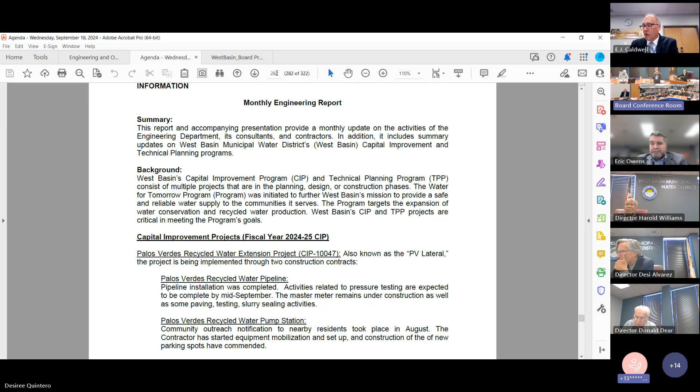Okay, then we'll move on to our next report. This item begins on packet page 282, it's our monthly engineer report. Leading us off, we have Barker Maserlian, our Executive Manager of Engineering Operations. We also have Kevin Cullen, our Engineer 3, Veronica Gobert, our Engineer Supervisor, and John Vanner, our Engineer 2.

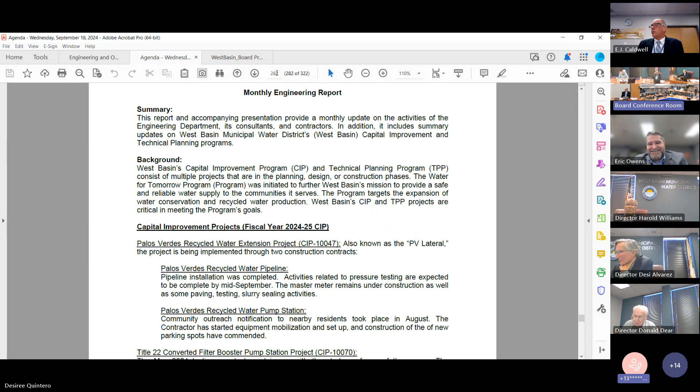If we can go to packet page 286 for a breakdown of the presentation. I can start off talking a little bit about the look ahead for next committee. We have Kevin here, who is scheduled to talk about one of the projects we've completed, the VFD replacement project, successfully. Also JMM phase 2, Kevin will give an update on that. PV lateral project, Veronica will talk about that, and then John can talk about some of the updates on the DCS. Happy to go through the full presentation, but if you want to pick and choose one of these topics, we can do that as well.

I will ask the board what their pleasure is. Well, how about it? Would you like one? One. Or listen to all of them? Yeah, one good one? Okay, all right, pick the best one. And Director Gray, are you willing to go along with this bunch down here? Okay, not hearing, I will take that for a yes. So I would say, why don't we have a discussion on the DCS improvement plan?

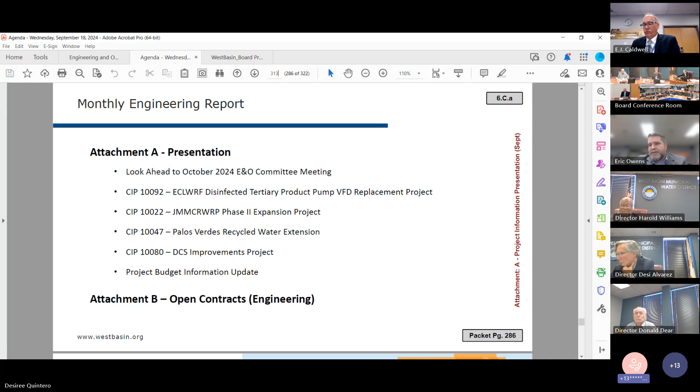If we can go to the next slide, 314, it's a pretty brief update this month. We had the advisor approved in the July board meeting. I'm happy to say we held our kickoff meeting today, so things are well underway, finishing 30 minutes before this board meeting. It was a long kickoff meeting, covered lots of tasks, very productive.

In terms of design build and procurement, we're still ongoing with outreach, meeting consultants in the field, doing site walks to get up to speed before we go out for procurement. We've completed the RFP template and the contract template. The scope of work, or performance specifications, is currently underway. All three of those documents have been handed over to the owner's advisor now, so it's their task to take those through to completion over the next months.

Our aim is to post the RFP for this in November and conduct procurement over a couple of months after that, and hopefully come back to the board with an award in February.

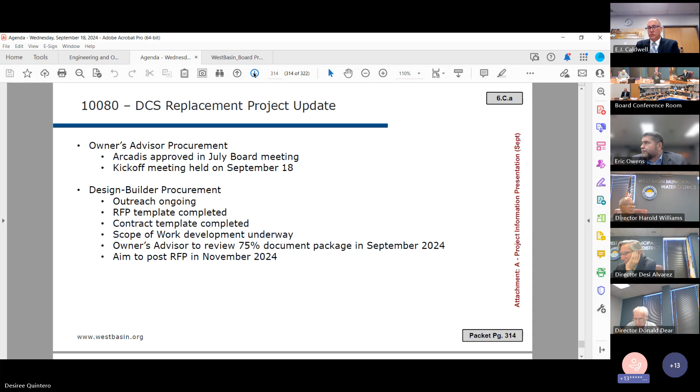This is just a summary of what I just mentioned. We're aiming to come back February 2025, award the design and build team through fall of 2025. We're hoping to finish the pre-construction phase, the initial design phase, where we'll get the guaranteed maximum price. We'll have our system selected hopefully in summer 2025 and bring that back to the board then. By summer 2026, we hope to have the system completed, installed, commissioned, training done, and all ready to go. That's the DCS replacement project update this month.

And if I may add, I know we said we'd talk about one project, but if I can add just one more note on one of the other projects, on packet page 294. Again, this is the VFD replacement project that we're going to report on its completion today.

I just want to point out that this project has come in under budget. As the table shows, the design costs, construction management costs, and construction costs all together came in at $508,000 under the $714,000 budgeted for the project.

In terms of schedule, we were able to complete the project with only 13 days over the completion milestone. So I just wanted to throw that out there, and kudos to the team that worked on the project and got it to completion.

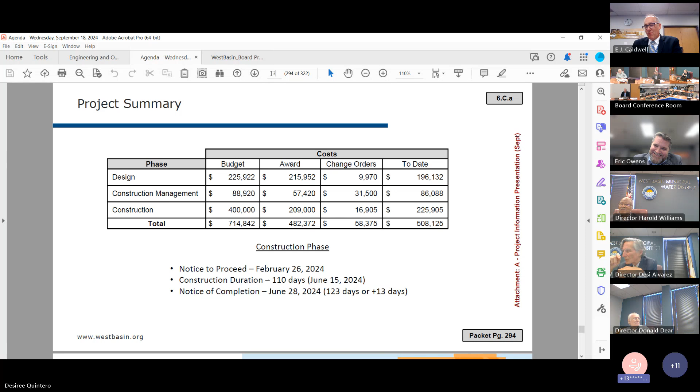Show the timeline for the procurement document being finalized. So when is that going to come back to the board? Yes, so in November, it's been coming back to the board with approval to post the RFP with those procurement documents. And at that point, we can go through the final points of the contract and all the specifications.

Okay, so in November we will be able to see those documents. Yes, that is the aim. They will come back to the board, absolutely, posted, hopefully in November. I will then keep the rest of my questions till I see the document. Thank you.

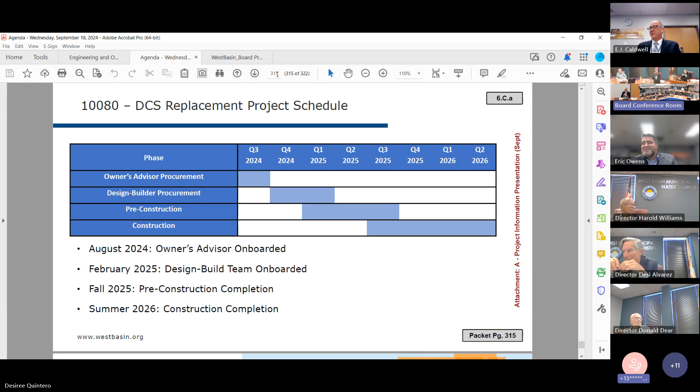Director Williams? No, thank you. Director Dear? I heard something once or twice today, it's music to my ears. Came in under budget, really nice to hear. That is the first time I think I've heard that here. Well, stick around.